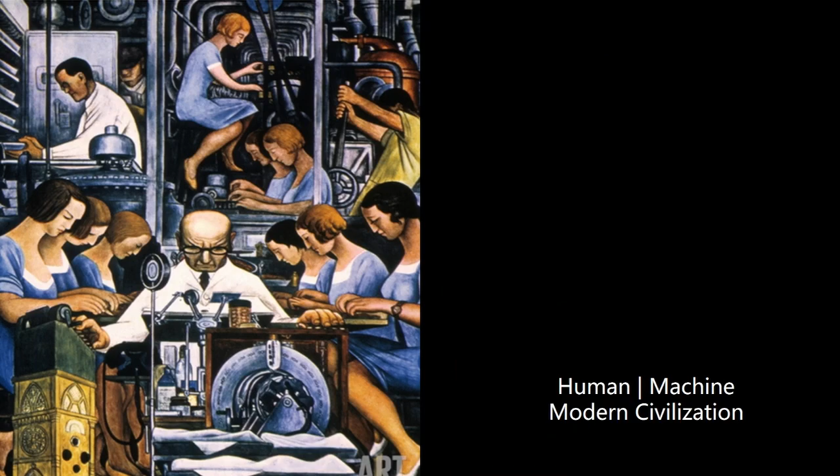As architects, I'm always ambitious to make space, architectural space for human beings. So I try to figure out a way to use the machine. After the Industrial Revolution 100 years ago, the relationship between machine and human being became more and more complicated.

In the former industrial period, people became a gear, part of the machine, and that's the architecture job—they do the pipeline, doing standardized work, which is very boring. It became more and more boring.

There were also proposals and scenarios for how people would deal with machines in the future. This is from Archigram, which is very famous. I think this is Cedric Price—he always uses this picture because people want to control machines instead of being part of them. So people want to step away from the gigantic installation and code everything, doing remote control with automation.

Since we are experiencing great change, I would define it as moving from the analog phase to the digital phase. It's a historical transition—you see the Fourier transformation. Everything is digitalized, like the sound wave and the music, as a historical prototype. Data and diagrams are becoming powerful tools for designers.

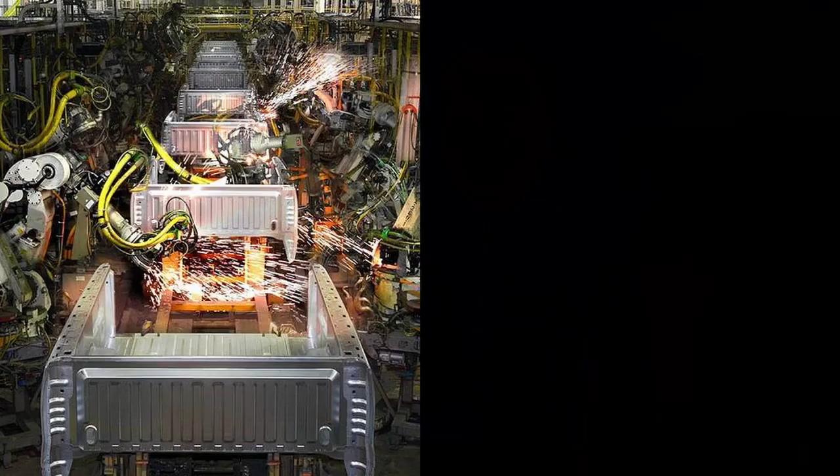A human being is replaced by the robot, and the robot is becoming like an automation system. This is already regulated in the car and mobile industry, but why not in architecture? Because architecture is very heavy on human labor.

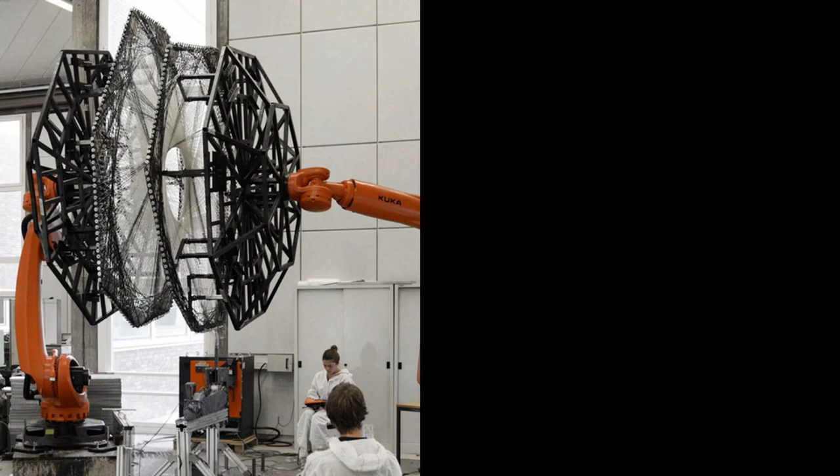I got a lot of inspiration from Benjamin and Michael Hansmeyer, the last time I visited. It totally opened my mind that there's a digital tool you can directly deal with building material in quite different ways. Also there's inspiration from Achim Menges, biomimicry research with megastructures using robotic technique.

Also for the structure discussion, there's Philippe Block's studio, which we visited last time. I was so impressed by their work, dealing with a lot of design content together with engineering stuff. It's multidisciplinary research. We could do a lot of things from historical clues.

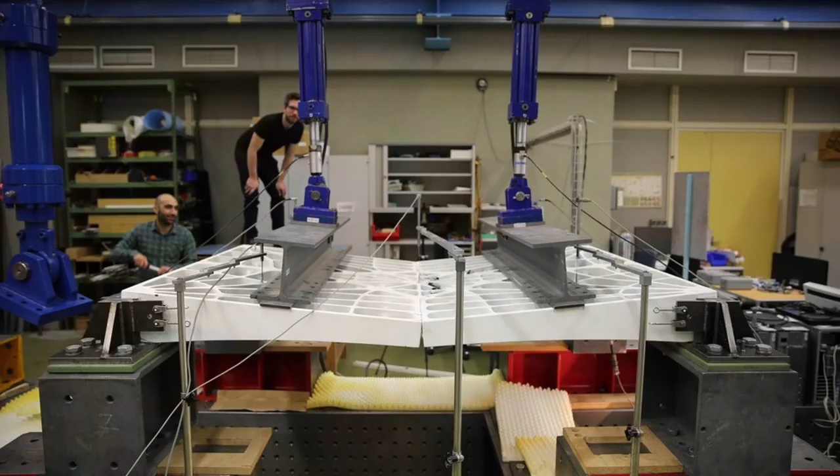Also this fantastic work from 2 years ago shows the engineering side becoming a very critical point for architects and other designers, because we have a lot of handy tools. You can physically test the structure, which will be a very important component for future projects probably. Ever since 2013, after I got back from ETH, I totally changed my work attitude towards architecture practice.

I started my digital things 5 years ago. I happened to find this picture after checking the data - it's from 2011. Yes, 2011, I made my first 3D printer as a pastime hobby. I didn't realize it was going to change my life.

I was totally excited to see everything come together after I learned a lot of new technology like electricity, MCU, computer programming, and mechanical design. It was only like making fun after my boring design work.

So I thought I could probably do some pedagogy stuff. I went to Tsinghua for my PhD degree and taught some classes. This is the first one - I connected 3D printing technique with a natural theme like a silky cocoon.

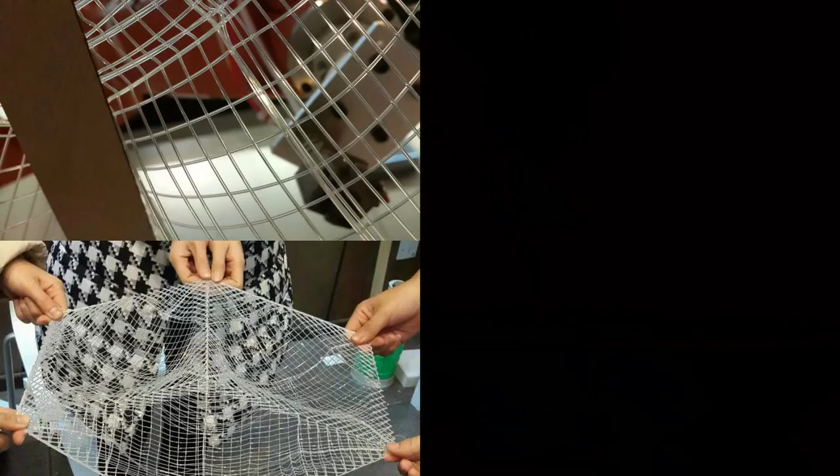So I had my student test a lot of samples. We wanted components with different kinds of shapes. After putting them together, it could generate a shell, which has a lot of discussion on the building material and the forms. I used Rhino VAULT 5 years ago.

It was maybe the first one in China. I did a lot of research and practice in school, and didn't realize it would become real architectural practice - it was just pure research. Then another one the next year, in 2014, at Shanghai Digital Future, was a workshop of 3 weeks.

So we stepped further with the discussion of silk at different scales. We wanted a megastructure scale, and we zoomed in to find the natural inspiration structurally from our research.

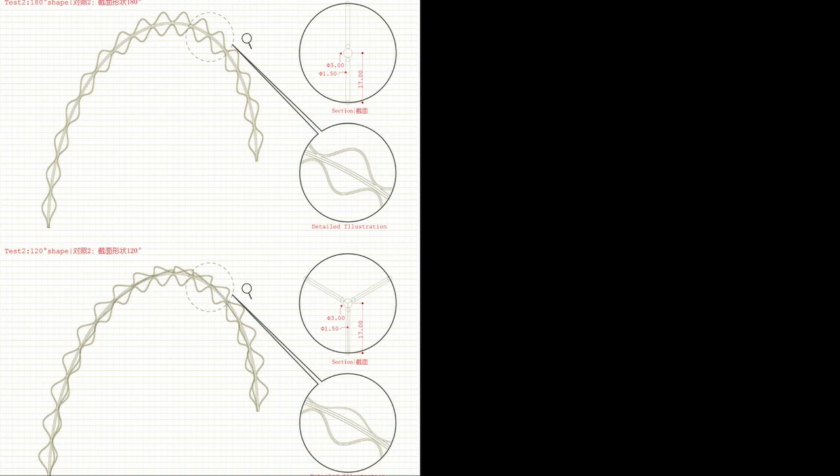This is the silk at 250x zoom, very, very zoomed in. We figured out that the cross-section of the silk is very specialized in a certain form. So we wanted to 3D print this kind of mechanism, achieving a structural feature similar to the natural silk - it's a kind of biomimicry discussion.

I also asked students to simulate this and test with a single load how it affects the structure in this kind of formation and configuration. We also used software to test how it works with a lot of different kinds of forces.

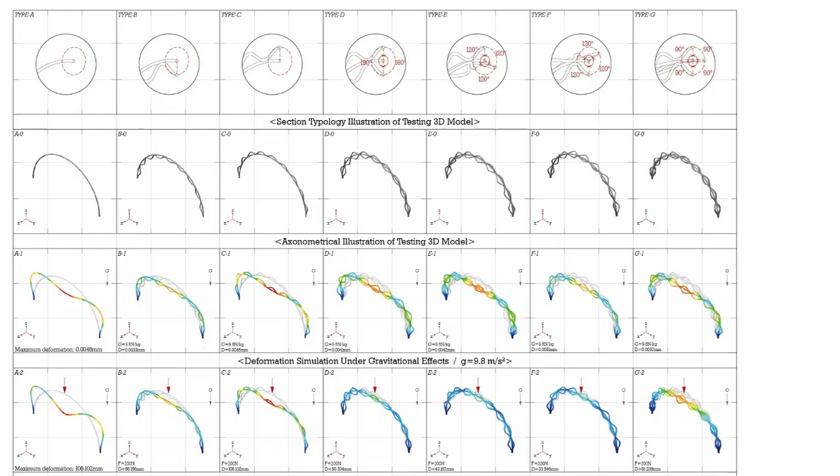Finally we ended up with a mechanical design that could be an efficient way to extrude the filament - a multi-threaded printing compound head which could produce, in one pass, the profile of the silk at a certain scale. It was a very quick turnaround.

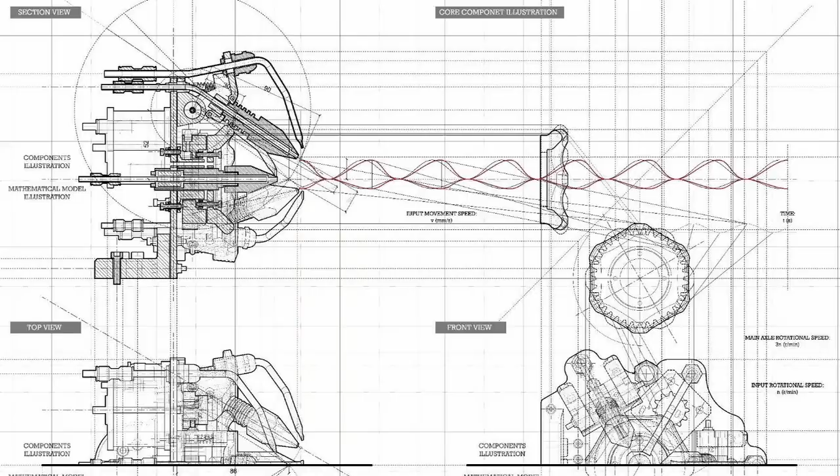It only took 1 week for the mechanical design because we introduced 3D printer SLS technology - we got irregular parts overnight. It's kind of a Chinese speed. Finally, this is the first time test, and everything worked so well.

By then 2 weeks had already passed. We also introduced Arduino for actual axis control, for temperature, for movements. So it's a compound project together with robot arms. This is the first test - it was very successful.

We finished this project in 3 weeks, which nobody trusted would succeed. However, it just worked out. This is the configuration, the biomimicry prototype - it's like a spiral shape, automated, made by the robots, and continuous work. It's nonstop - you'll find the clue from the video.

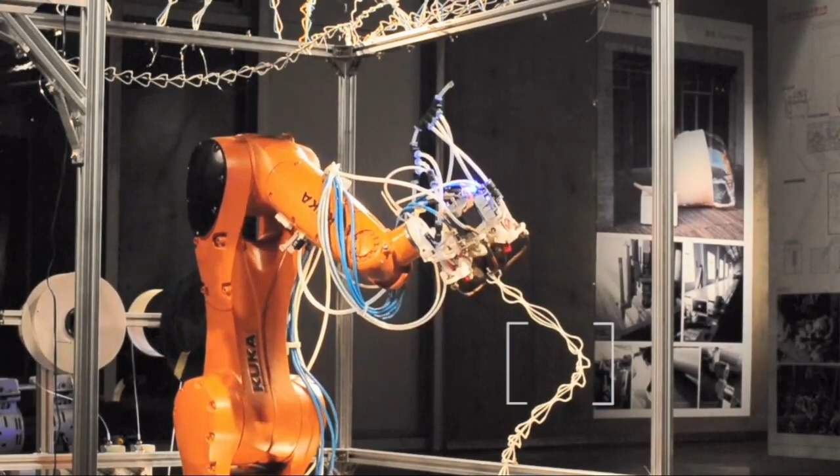This is actually my first experience with KUKA robots, four years ago, and I just played with it. It's nothing about the business, just kind of having fun in the summer, not a serious attitude, whatever.

But the next year, my design attitude changed because I did a lot of mechanical design. Everything I wanted to have a chamfer, fillet, corner, whatever. I had to control myself because I was so depressed going to the engineering side instead of poetic architecture.

So we went back to the engineering side, and thought why not use this technology with traditional material like concrete? We use 3D plastic filament together with concrete, a kind of mixture. It kind of saved my heart from the embarrassment.

So we kept using RhinoVAULT, a fantastic plugin by Professor Philippe Block and Rippmann. Because we have only one single material, plastic, we wanted to have big structural coverage.

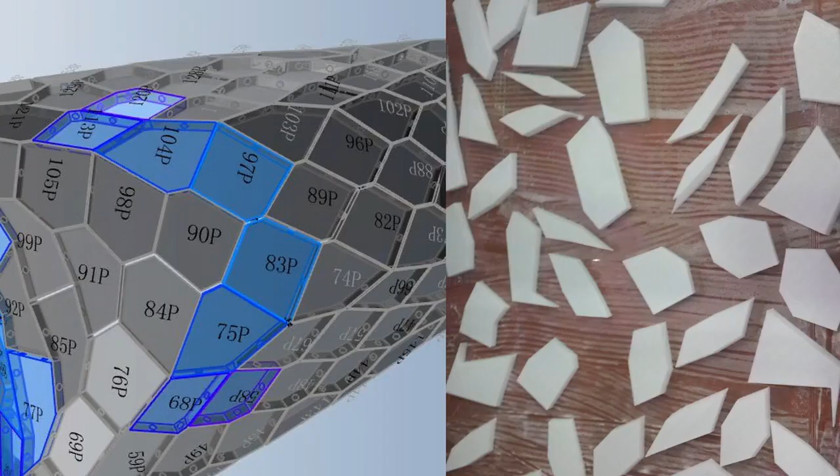So we have a form that we planarize. We tessellate it into pieces, which could be printable by our custom-made 3D printer.

There's a lot of geometric discussion because planarization is a very difficult thing. So we use Kangaroo, a plugin in Grasshopper, a lot, and figured out our own way.

So we developed our own generation code, a kind of G-code, because we wanted to reduce the material cost and also wanted to have a silky skin back from our former research.

Also, working with concrete was the first time very dirty work. However, we were happy with it because architects in school never get to play with real material, especially concrete. It involves a lot of chemical reaction, and it's a very nasty job, but we were pretty happy.

We have a concrete extruder together with a KUKA Agilus robot. We wanted this kind of semi-automatic activity, so all the pieces are digitally and parametrically controlled.

So this is the process, and it's a test. We actually pretty much succeeded. It has a lot of concrete, like a silky concrete, or fiber reinforced concrete. It's a typical concrete research.

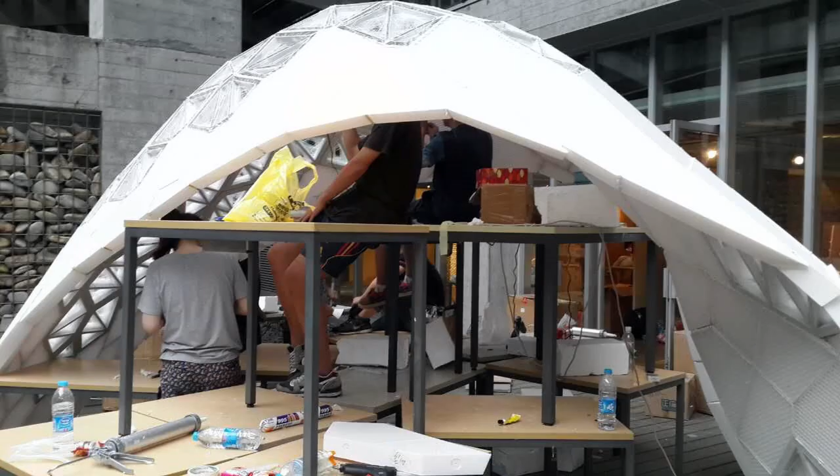So in scale, we were very bold to scale it up and cover a lot of people. It's like 5 meters from corner to corner and 3 meters tall, and people literally stay underneath it safely, because we trust that the concrete will frame every block to give enough rigidity. It's lit. There's a video.

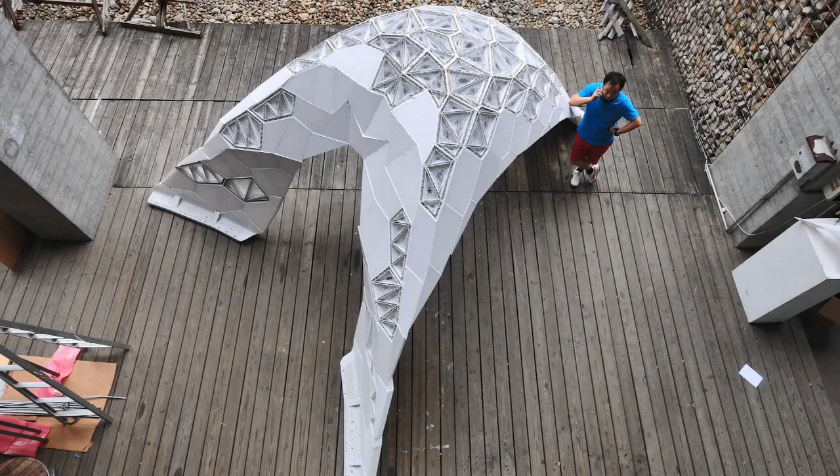After the Shanghai Digital Future project, still with concrete, I went back to Beijing and met the curator of Beijing Design Week, and she was very interested in our projects.

She said, why don't you make a bigger one? It's a public space, so it was such a challenge. We had to finish this project before the opening ceremony, with only 2 months left. However, we wanted a challenge.

This is the final shot. We named it Volcano Pavilion because we wanted to use RhinoVAULT, using gravity as the internal force to make the form, like a volcano eruption.

This one is fairly big because it's a mixed-use, very high-end commercial space. We had 500 square meters to be dominated by the installation, so we stepped further with a 12-meter diameter, a circle with 3 identical compartments.

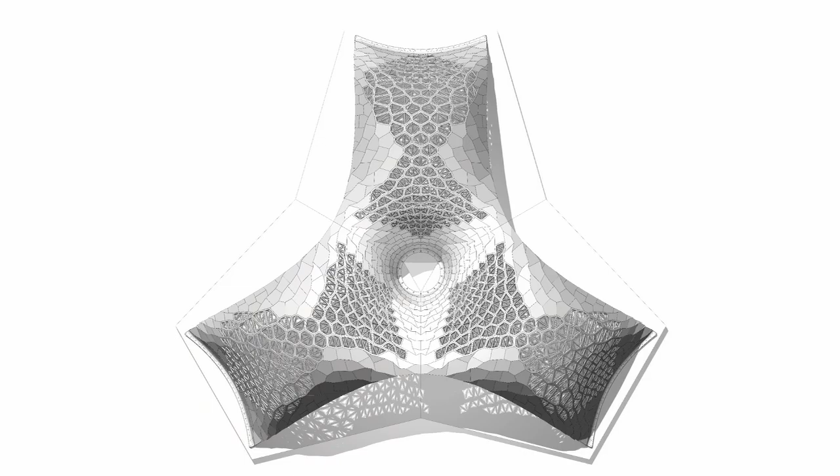Each compartment is identical, but together there were about 2,000 pieces. It was so difficult to figure out at such a bigger size, because firstly we had no experience with such a big installation, and we had to finish it in 2 months, starting completely from scratch.

We actually finished the design quickly because of the experience borrowed from the Shanghai project, and we launched 3D printing quickly. Since it's a temporary installation, we had to figure out a way to put these pieces together with a certain kind of precision, and also control the tolerance.

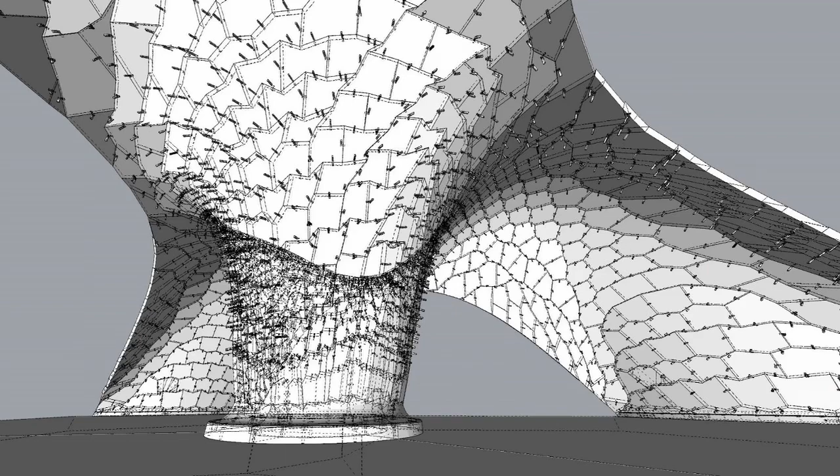So it's such a big one. If any single piece misses the precision, the whole thing probably gonna fail.

So that's my workshop, in a very traditional courtyard house. The whole space is covered by all kinds of 3D printed pieces. We actually had our own patented 3D printer, developed from my stupid little one, so now I'm able to print 1 cubic meter in size.

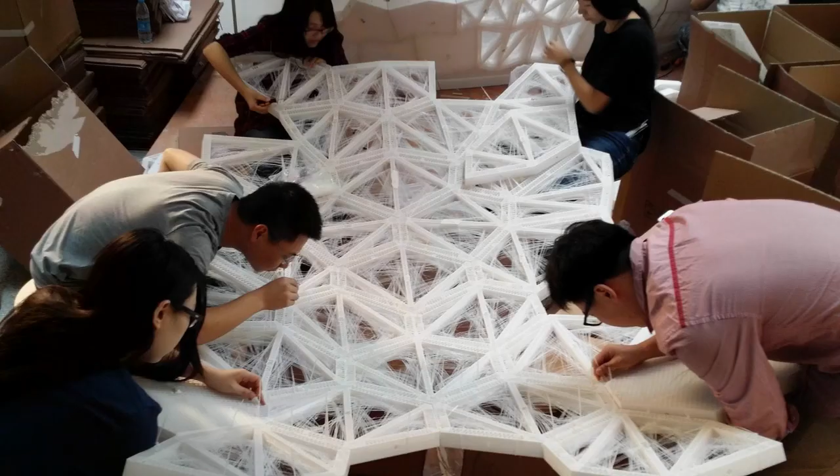So our regular size is 50 centimeters cubic, so we just scale down every piece within this scope. And there's a lot of installation work from volunteers, my students. We had a lot of trouble doing assembly on site because there's no scaffolding.

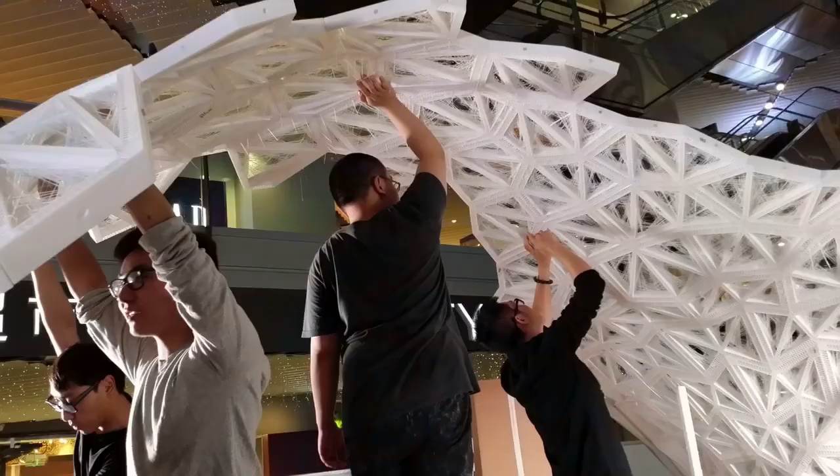This piece is kind of a relay, one by the other. If one single thing is wrong, all the others have to be taken off and redone again. So we use the technique from one side, both sides meet at the center, and the zip tie becomes a critical connection to help.

There's a lot of pressure from the schedule. For the first week we almost lost our confidence because nothing happened, and then in another 2 weeks we finished such a big installation. So I was thinking to escape Beijing if I didn't get it worked out. Finally it turned out pretty good.

You find the scale from the references, there's a man in the middle. It's the most critical point where the 3 identical big components meet together. We had a lot of unskilled students, but it came out pretty successful.

It's this silky feeling. You stand right underneath the canopy, and it's just a wonderful moment. Here are some shots.

During the Beijing Design Week, which is about 2 weeks, we welcomed a lot of visitors because they were so interested in 3D printing, and we call it 3D architecture.

There's also a Guinness World Record from the client side, they said they want to promote their commercial space. It's interesting, I want to mention this because the Guinness governor came and asked how do you want to apply this Guinness World Record. I said I think it's fully 3D printed. No, the nail over there you buy it in the hardware store, right? So I think it's 3D printable.

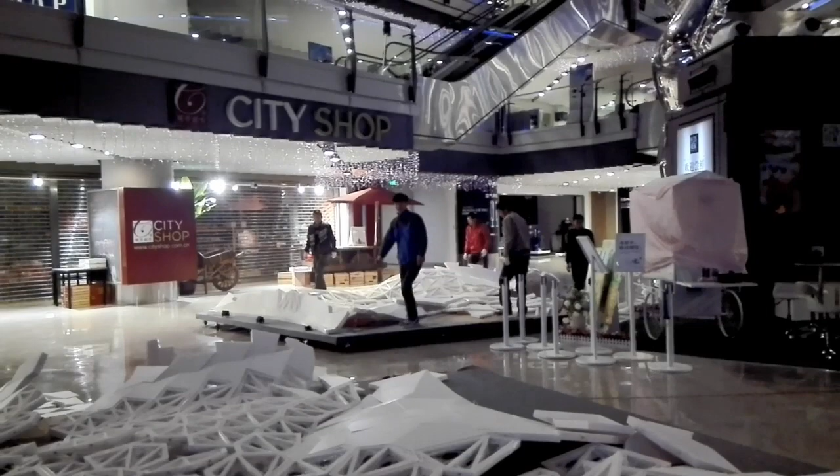This dismantling is a very sad moment, but it's the way to test our calculation based on the Rhino Vault plugin. It's a probable collapse, and it was garbage finally.

So we keep going for another commercial project, after we became very experienced with making a bigger space for human beings. There's a client that wants to have an exhibition in Hong Kong, but they have a specific requirement for the exhibition.

Another requirement is that everything has to be installed overnight. So this one, as I mentioned, it's 3 times bigger than the Beijing Design Week one. It's over almost 300 pieces together, and it's not symmetrical. It's everything very free, from the irregular shape.

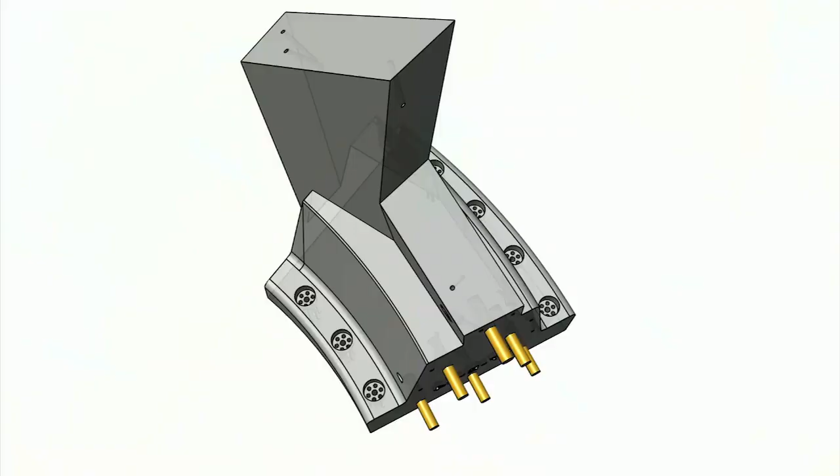So we figured out a way to accelerate the installation just by screws. Every single piece is screwed together, like this.

That's exactly the speed the Hong Kong craftsmen, the professionals, they make. They finish the whole thing within 8 hours. There are 20 staff working around, so well organized. Everybody knows what's going on. They don't need a director to say, hey, you do this, you do that.

This is like automatic robots, somehow like that. So during this opening exhibition and construction, everybody knows their own position. It's amazing. And this is the final auction after the exhibition.

So the client wants to reuse it, this is another installation in Beijing. They just ship everything back, screw it out, and screw it in again. It's very quick.

So this is the Silky scheme. This video will represent the Silky scheme we have done over the past 3 years.

It's just, you know, when I was younger, about 3 years ago, I wanted to try a lot of different things. This one we use one single robot, but it's a gripper, with a lot of tools around.

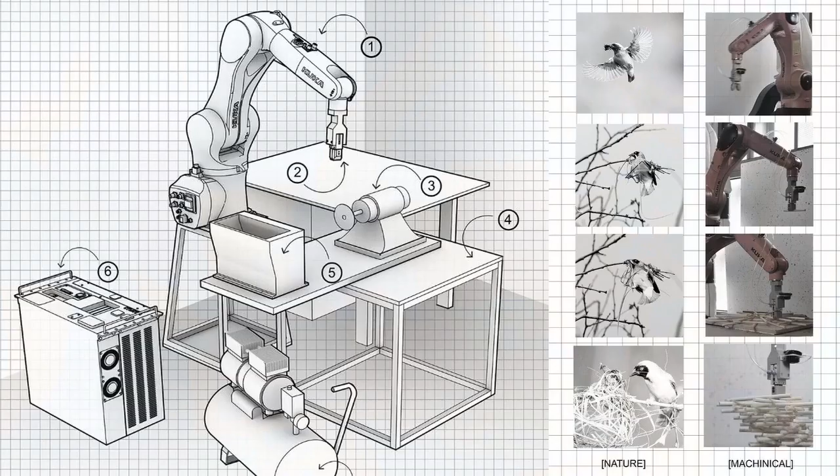It grips one single wood stick, like from a McDonald's chopstick box, and you can make the workflow continuous. It also cuts to a certain length and makes the notch at a certain angle, so each one has a very special relationship with its neighbor. We heavily rely on the computation result for the workflow. There's a video that gives the whole story.

So we have about 400 wood studs in different lengths and with different angles. This is one single robot working overnight, 6 hours, to make a bird nest quickly and efficiently. The only thing involving human labor is gluing them together, because it's only a 9-day work camp.

So we probably have another version with a fully automatic system.

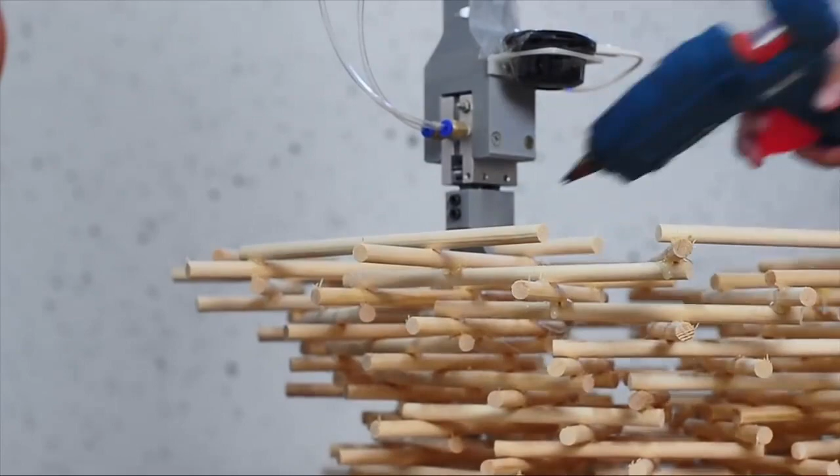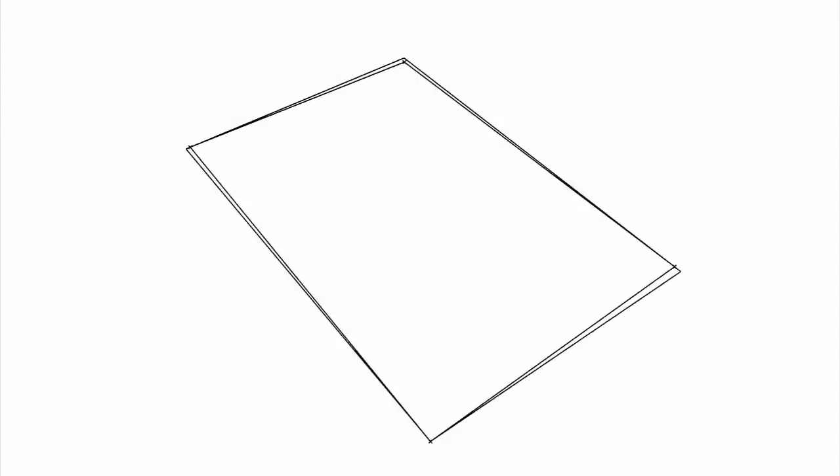So for the next year, I'm going to go quickly. The next year we kept making things bigger, and we became more serious than the first year. We wanted to use a reciprocal structure. We have some historical hints, and I wanted to keep the wall system because it uses one single material for a bigger space — it's a very smart solution.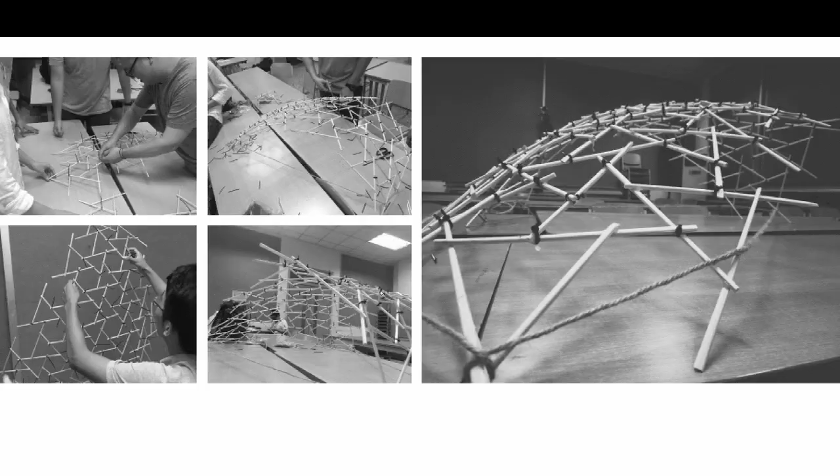For us, we have one single timber structure, but we use the strategy of interlocking to make the space. This is the test. Each wood strut has a different notch, letting them fit together.

For the third year, we wanted a lot of people to get inside the structure. So on top of the structure, we used branch structure technology and a program called Solid Thinking from Altair. It's inspiring — we discussed some natural phenomena about how to make a structure lighter and stronger with less material. So that's how it goes.

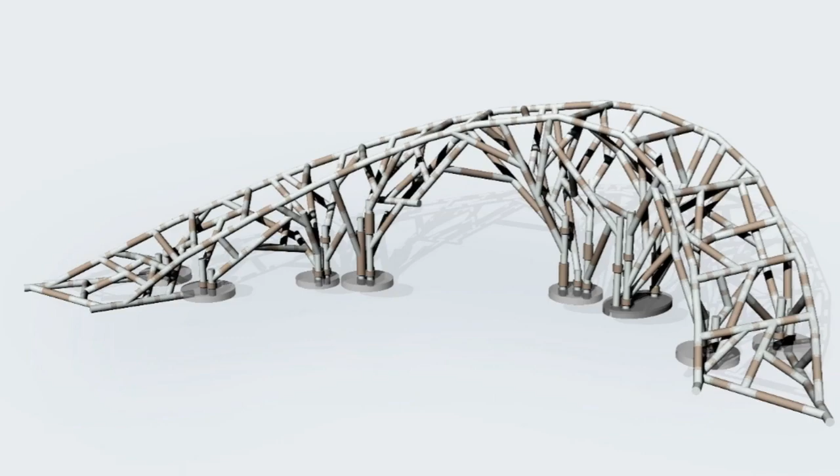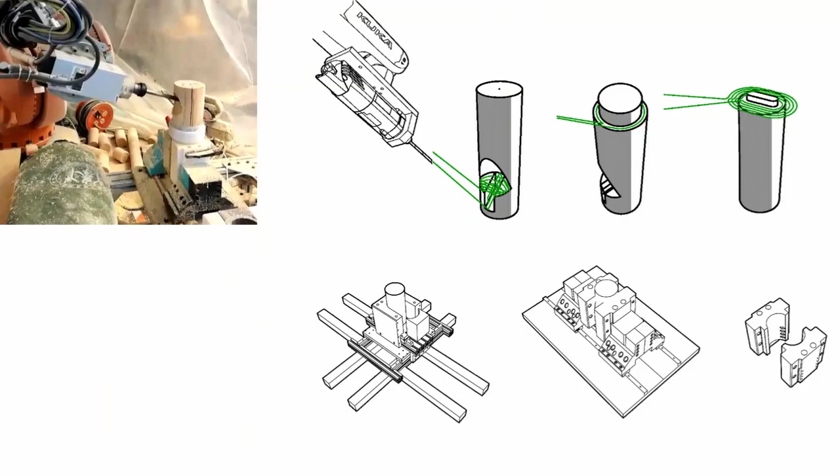And this is big robots. We had some tests of how to make the work path figure out the connector within a certain range, because the robot is not always very friendly due to its mechanical constraints, especially singularities. So we developed a lot of tests on how to put things in one position and work out all the angles with these very simple cut milling strategies.

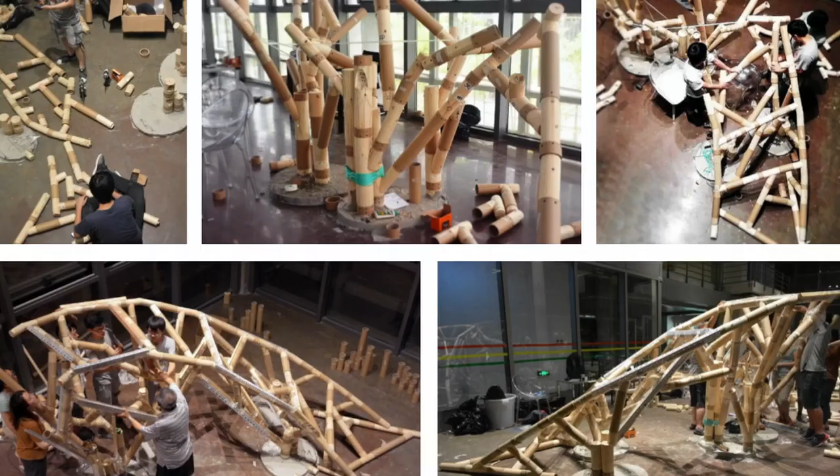So there are more than 400 joints and 800 wood struts, produced by one single big robot in only 3 days. And that's the finished one — a 10-meter long bridge. We did a weight load test to check the rigidity, and it works pretty well.

So that's the research. The next phase, I'm going to talk about some commercial projects based on the robot and 3D printing. Since we have a lot of big 3D printers, and we also have the technique to make things like this, for instance, it's a curtain wall system.

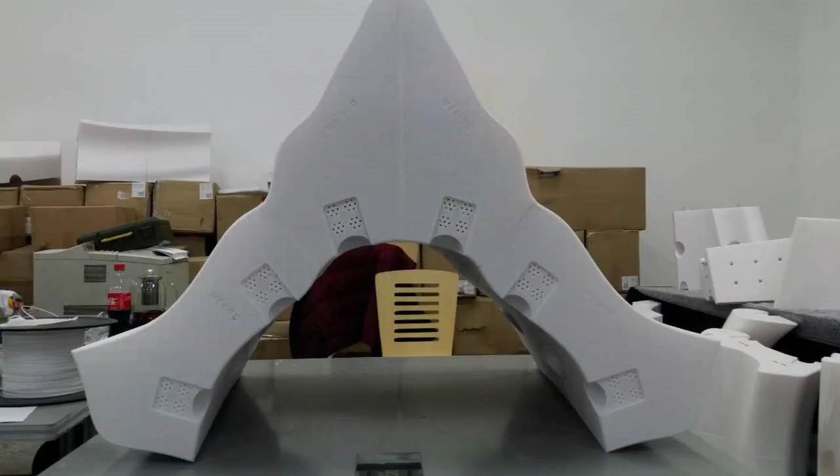It's a corner structure for a 3-floor tall building, and for this project we used almost 10 tons of PLA because the client is very crazy. That made us very crazy too. So we wanted to challenge the size again.

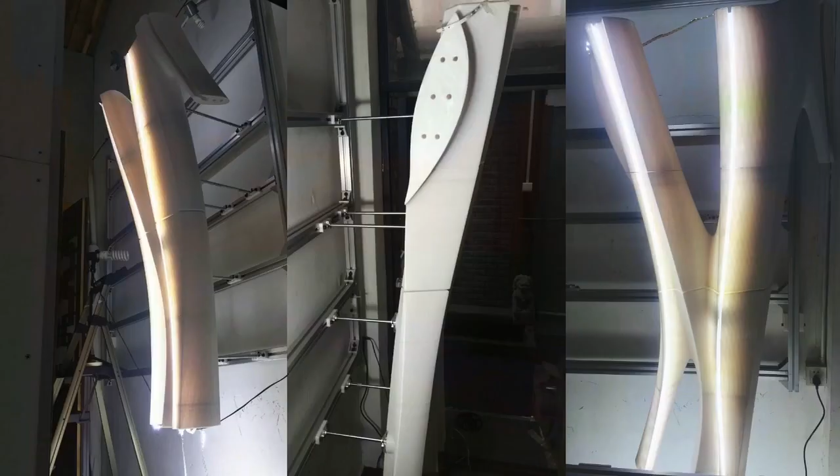It's like 2,000 kilometers away from my office, so everything had to be packed. We had a big truck carry everything over there. So that's the view. We also did the one-to-one prototype to prove to our client, to persuade them this worked out.

Also the lighting system is embedded. It's like one single solution for everything. It's a construction site, and you can tell the scale from it. It's a 3-floor building, and it's pretty apparent. It got attraction from the corners, the street corner.

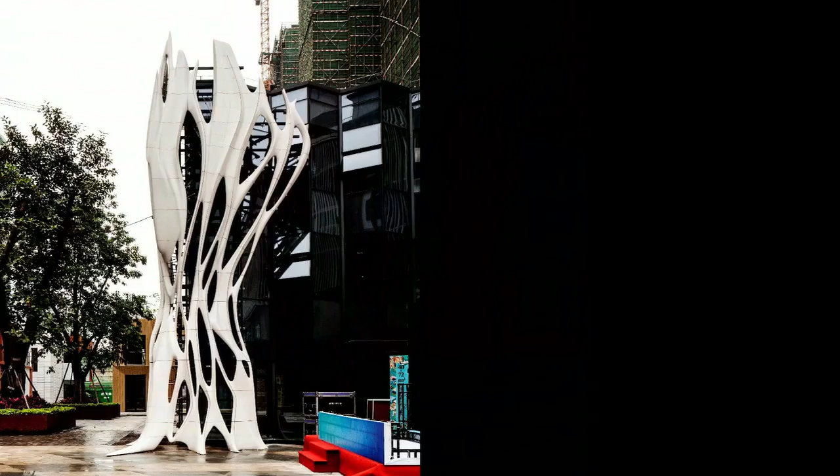So we also developed the curtain wall connection system. There's a lot of tolerance, errors during installation, because the workers never had this kind of experience. I would tell them how to make it, but they were really slow. So we had to find a way to counterbalance the tolerance, with a lot of connector design and different angles to make the compound structure stabilize the whole thing.

It's the lighting at night. There's another one nearby. This is the toughest project we have done, not commercially, technically, and in management. There's a lot of bad stories, but it ends up pretty successful because it's built.

The client asked us, it's a very silly cube box, how do you make it up, like gift wrap? So we thought about wrapping a net around it.

We have internal forces that shape the web, like from the balcony or from the entrance. They have different density because they're represented by different forces. The developing algorithm is very simple. It's the box.

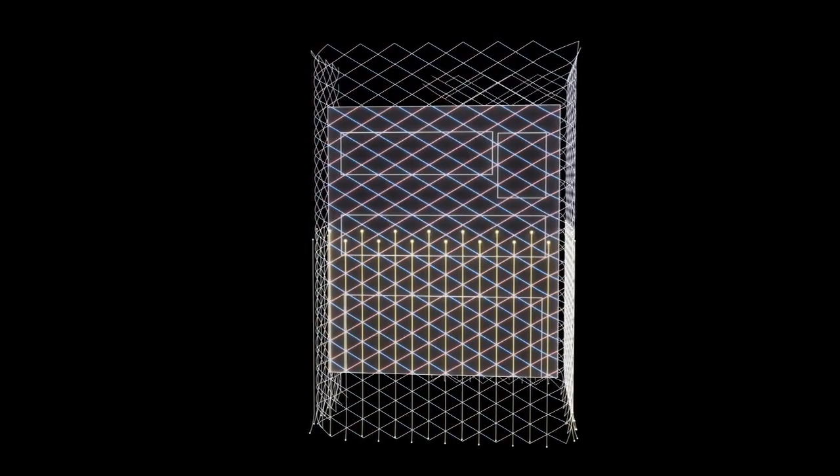So I have 3 kinds of threads interwoven together, and the web is deformed. Firstly it has a thickness, and then it's deformed by the balcony, extruded out with a lot of strength.

And the threads make the shape like interwoven together. It's the most crazy moment. And the form.

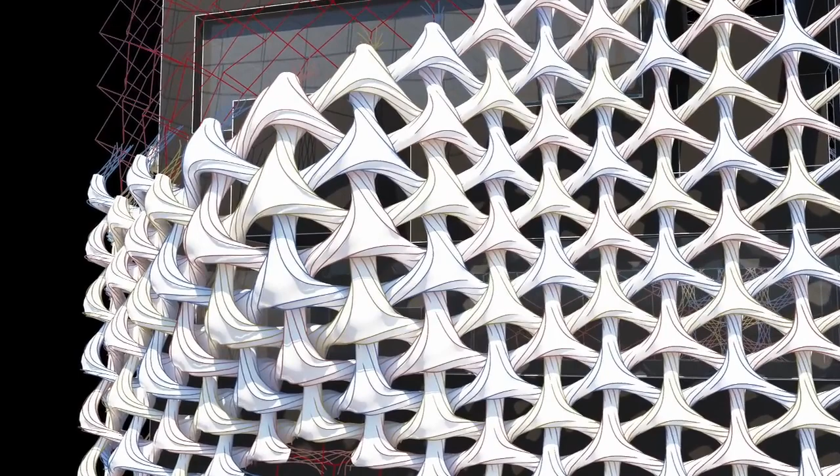This is how we split parts into 2 kinds of typical things. And we also did the one-on-one scale prototype for the proving.

And this is my 3D printing farm. We also had a lot of trouble during the installation. We had to deal with it, because each member is different from all the others, with totally 3,000 pieces.

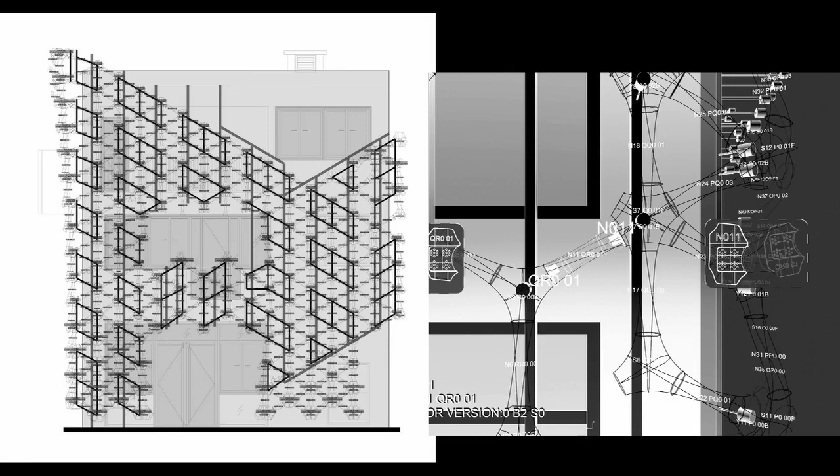So we had to number and label everything. We also wanted to label the relationship with the neighbor, so each single piece has a lot of codes to guarantee its position is right. So we have an installation manual as thick as an encyclopedia. And it's the final.

This is the curtain wall system we developed, and how it connects with plastic. So everything we have to deal with on-site, because it's like 2,000 kilometers away from my office. So everything has to be carefully tested before the logistics.

And it's the lighting. So the light is on the back, strategically embedded during the installation, so you'll never see the direct shining. That's kind of a pollution to eye vision. So there's drone shots.

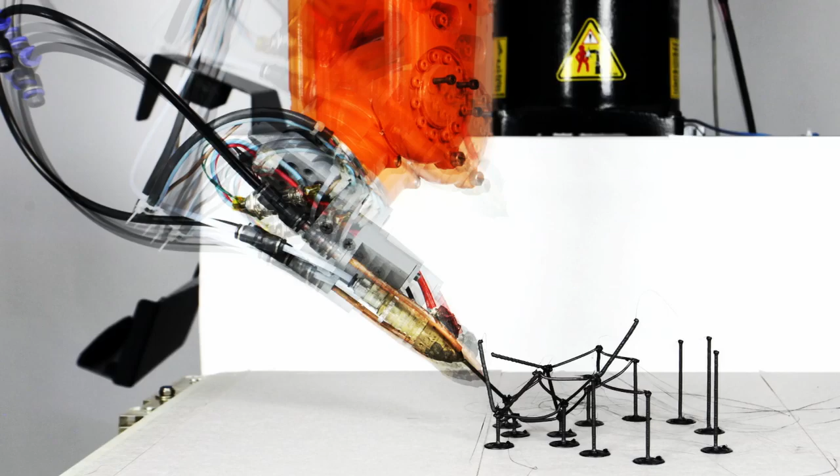So we use a robot, because the robot has 6 axes, spatially capable of making things different from the layer-by-layer style. We developed the algorithm in collaboration with Chinese Science Technology University's Mathematics School, with a lot of deep coding in C++. We figured out how to manipulate the robot scientifically, because you'll have a lot of trouble: collision trouble, extrusion trouble, material trouble.

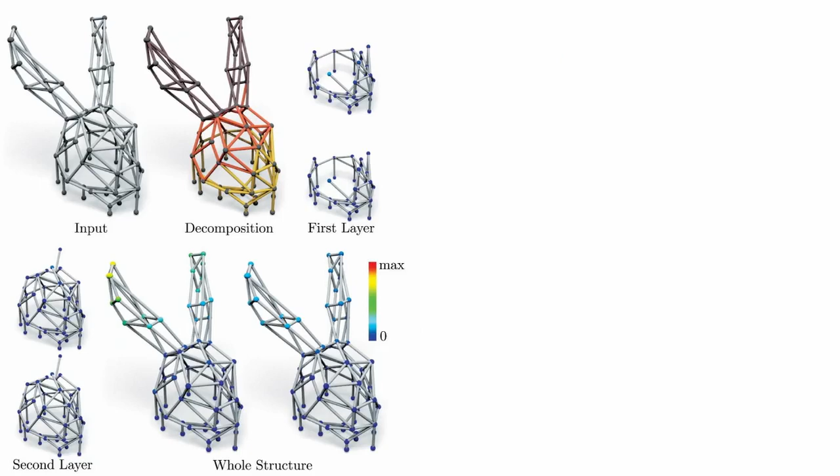It's just a lot of things we have to overcome during this one year's research. We also use topological logic in how we group them, and we calculate to reduce the calculation amount. We have to group them scientifically and figure out the working paths one by one. So that's the process.

It's pretty flexible—a continuous, non-stop, no human involved generation of 3D spatial printing. There's design, sculpture, and surface modeling. It is extraordinarily unnatural to fabricate frame shapes using FDM 3D printers, because they are fabricated layer by layer, resulting in a slow fabrication process and low quality products.

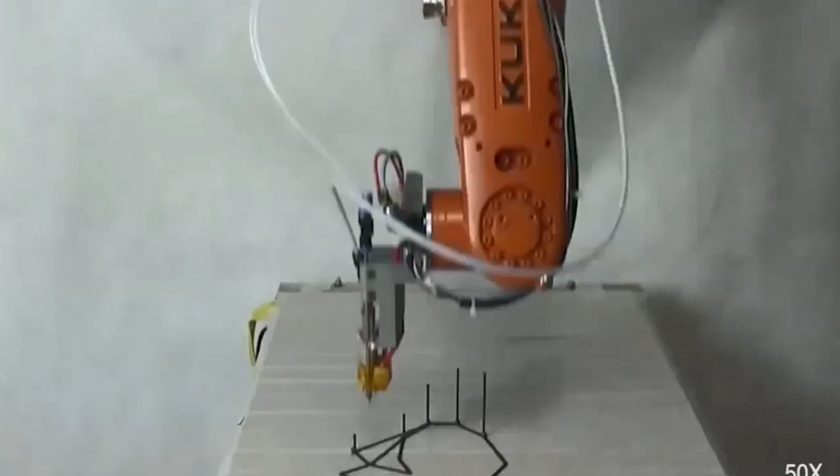In recent years, various fabrication systems have demonstrated that the use of a robotic arm equipped with a custom extrusion tool can more efficiently fabricate frame shapes. In this work, we propose a fabrication sequence design algorithm to search fabrication sequences for general frame shape fabrication. The generated fabrication sequence is collision-free and guarantees that the printed structures have small deformations during the whole fabrication process.

In our experimental setup, we allow the extrusion head to have different orientations for fabricating different frame struts. During the whole fabrication process, the printed parts should be in static equilibrium, and the extruder should avoid colliding with the previously printed parts when it moves.

The ear part is toughest.

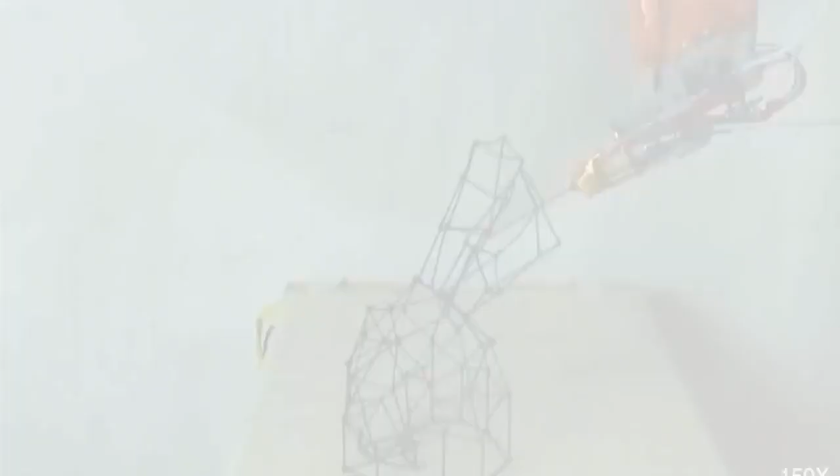The fabrication sequence searching problem is quite challenging, as it is essentially a dynamically constrained searching problem. The collision detection between the printed parts and the fabrication candidate struts is sequence dependent, as is the printed node deformation. To solve this challenging problem, we develop a divide and conquer strategy that first decomposes the input frame shape.

We decompose the frame shape into several layers via a constrained L1 optimization method. Then we find a feasible fabrication sequence for the individual layers via a local optimization method, together with a backtracking strategy. To verify the validity of our algorithm, we build up an experimental robot system.

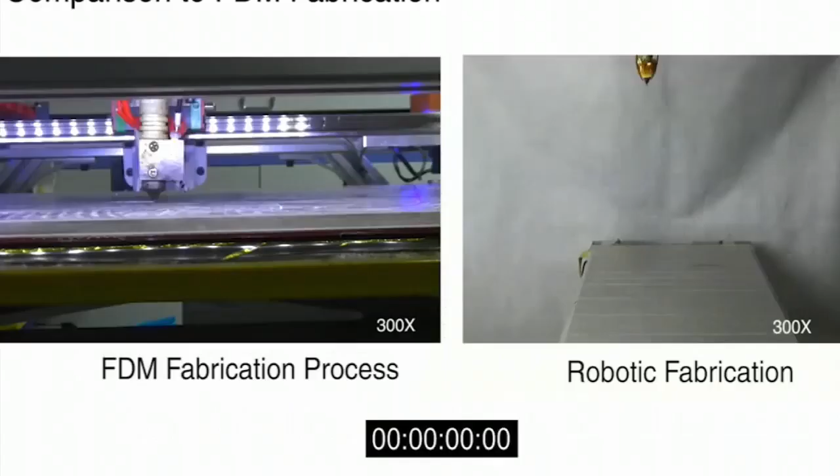Finally, we compare our method with FDM technology by simultaneously fabricating a bunny head frame shape of the same size. It can be observed that the fabrication time and quality of our method exceed that of the FDM technology.

We have been taking a lot of reference from ETH, especially Professor Matthias' work, because it's an exploration across the boundary, toward all kinds of possibility for robotic fabrication in the architectural language. So especially for traditional material like concrete, we went back to concrete because we had a lot of projects that used plastic.

You know, it's just expensive, and its endurance, and it's not climate friendly, so we have a lot of trouble with the clients. So in order to keep the business going together with my research, we think there's probably another way.

We thought to transform the traditional technique like slip form. So we found this reference, which is also an important milestone for dynamic cast towards slip form in Matthias' research. So what we figured out is that it's possible.

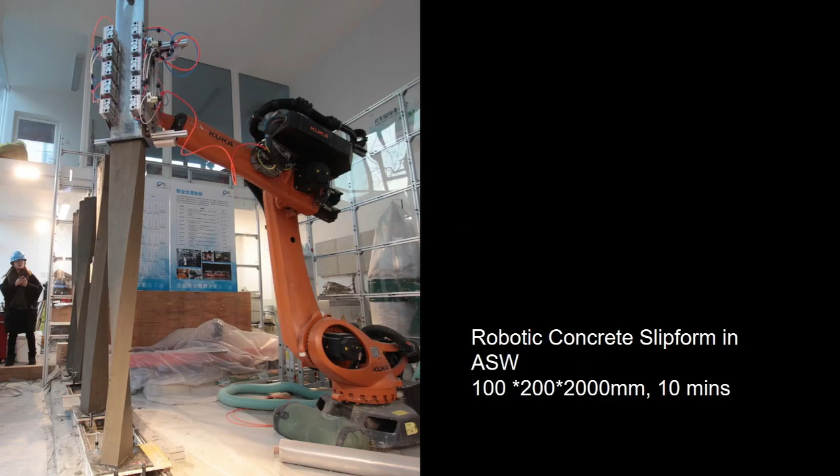Firstly, we copy this idea—take a big reference—because it's going to be another discussion instead of a structure. It's a structure element which is very sensitive in the building industry for safety issues.

So we think if we are able to make this kind of a decoration for energy eco-friendly building facades, we translate this idea to another discussion, which is for more productivity, because concrete is very, very difficult to deal with.

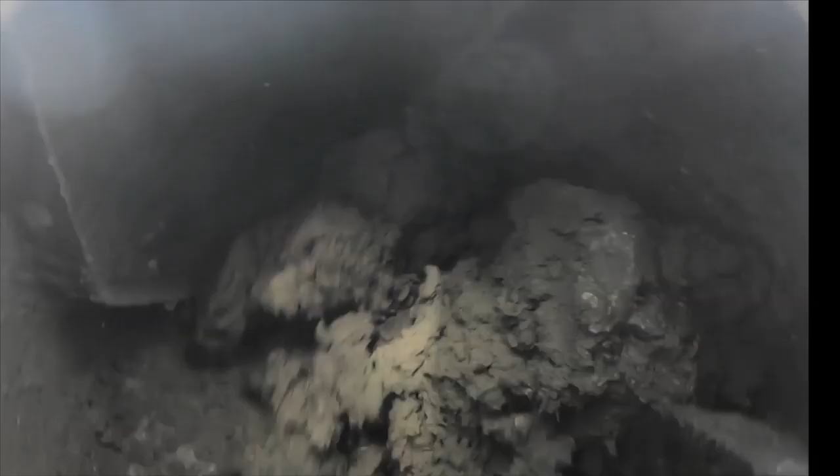It's a chemical reaction, so it's long-term research. It's slow and hard to control the shape. It's kind of a slow chemical transition. So we have to figure out how to make things quicker and bigger.

It's a project we have done recently. This is the process.

So we're thinking for the robot, as we always use in our research, there's only one robot, but it has multiple functions—kind of a simulation to human arms. It's like we have one or two hands, and we do different things with two hands, using different tools.

So if a robot can have kind of multi-function hands, like in this case a gripper, we are able to increase productivity by saving time. So we developed this gripper which is very strong.

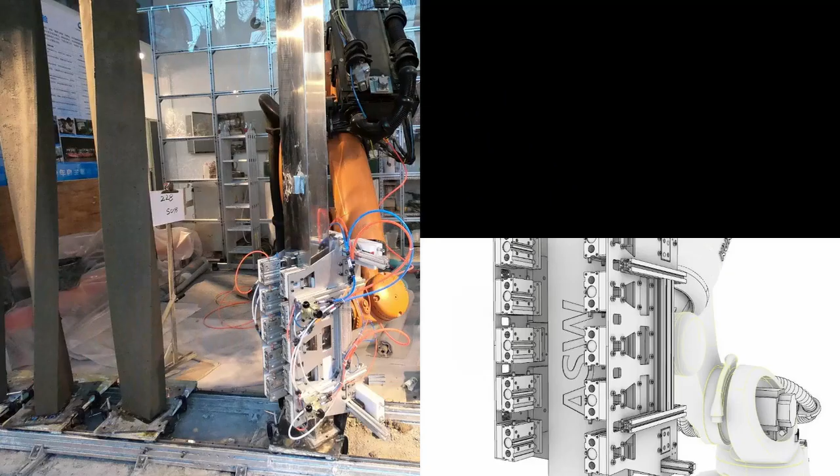It's a certain kind of situation that's able to form easily, but it's not collapsing in that situation. So we are able to increase the efficiency.

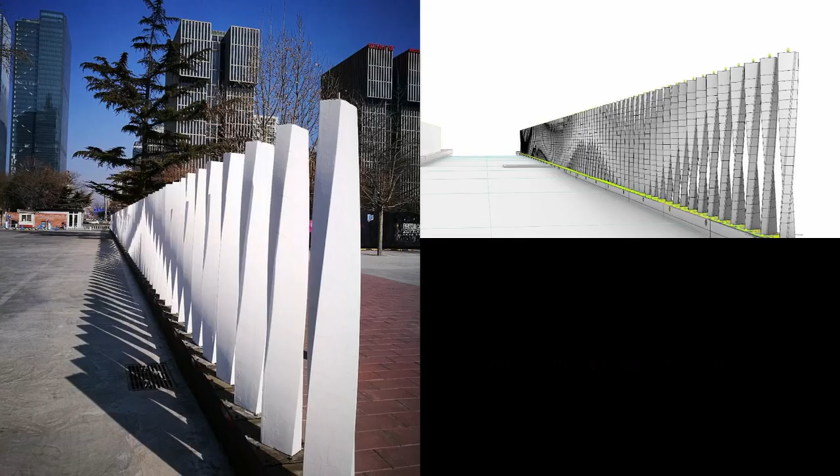This is the project we have done in our campus with 115 columns. We finished this in one month, about every 10 columns per day. We used half a month to test the system and another half month to produce it.

It's also interactive because we have a sensor. There's a light between two columns at the bottom, and during the night, as people approach, it's kind of an interactive reaction with the human being. So it becomes not a wall, but a separation line between the pedestrian and the parking lot. It's another kind of description, representing modern technology, a kind of promotion for the campus.

It's also used with robots, so we found clients. They have a huge project, about 500,000 square meters, and they wanted something new with robots.

So we persuaded them that if we have this kind of configuration on the facade by robots, it's one solution that gives a lot of variations based on analysis, the solar energy distribution analysis. So you get a good looking facade, and at the same time you have a better interior environment.

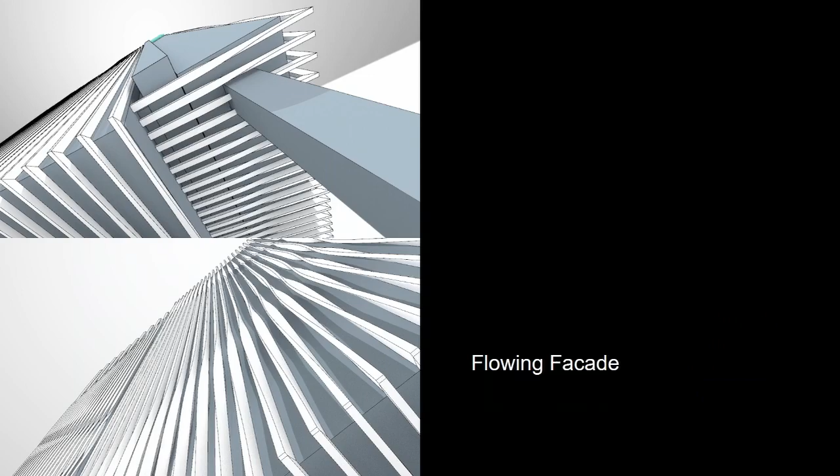So let's go back here. Everything you can parametrically control in a computer, and get the data back to a robot. You have one single mold that gives different kinds of profiles. It's a kind of sculpting the facade in a very simple method. Also you have the round corner, it's like a twisting shape, continually flowing on the surface.

So it's just whatever you want. We just change the parameter and you get a different look.

So we're getting halfway, we have to coordinate with Norman Foster, and they're kind of interested. So we're on the way to make things a lot bigger, as a skyscraper, the facade part of it. That's the latest one in my office.

So we're doing research, we're doing practice, writing on both lines. We have to survive, but we also want to be advanced architects at the same time. So it's like keeping my business and my research in good shape. Thank you.